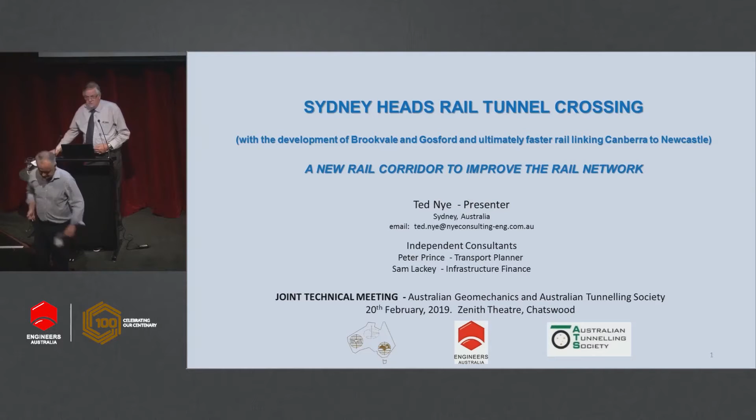Thanks for that introduction. I've got about 30 slides, so I don't want to do PowerPoint to death, but I hope you'll find that they're interesting slides.

So, I thought of this idea in '96 and took it to state-wide roads, and apparently at the time Lend-Lease and AMP were looking at a single track tunnel from Bondi Junction down to Bondi Beach. I didn't get involved in any discussions with Lend-Lease or AMP at the time, just with state-wide roads. Anyway, that got a lot of public protest about having a station at Bondi, so that project sort of just went by the wayside.

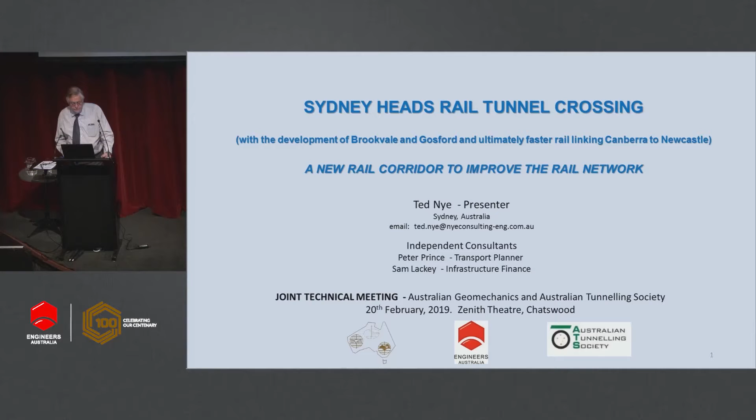Having known that, I then looked at this particular project with the idea of lessons learned, minimising the impact on the public, both in its construction and its operation. Peter Prince and Sam have been very strong supporters of what I'm trying to do.

Our objective in this - and this project is not on the government's radar yet, so I could talk a little bit about politics and meeting people in transport, but maybe I'll leave that for another day. There are some politicians who are very, very supportive, and others that don't really give any sort of reaction. I don't know why, I'm not a politician.

So our first thing is to get this in front of the state and federal government and get it part of their planning policy. Once that's happened, if it happens, there'll be some momentum to do a feasibility study and then a business case. For this tunnel under the Heads project, the business case is a really important part of the whole project, and part of that is developing Brookvale into a satellite CBD. I'll talk about that a bit later.

I've published two articles already. In November 2017, I went to a tunnel boring machine conference in China, in Wuhan, which was very interesting - about 70 speakers over about 2 days, with lots of case studies of Chinese tunnelling, and a few of us from overseas giving talks on our projects. You can download that from ResearchGate. The other one, published in October 2018, was in the Australian Tunnelling Journal. You may or may not have seen that, but you can go to the ATS website and download it, or go to the Tunnelling Journal website.

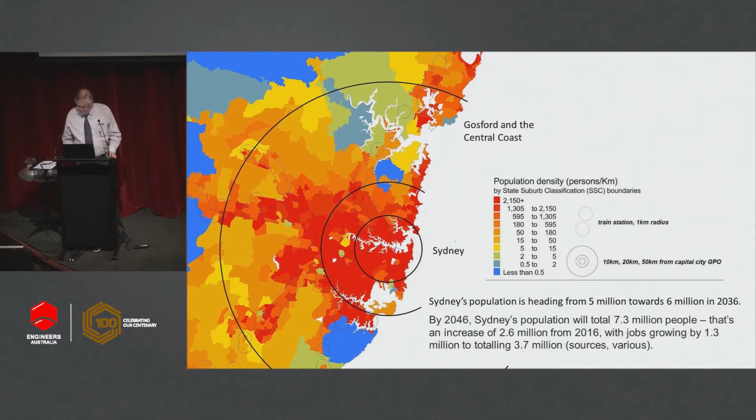The important other part of this project which we envisage is, if you're planning a transport network, you've got to connect transport hubs together. So the idea would be to connect Chatswood with Brookvale with a light rail connection. Now this is all obviously in the future.

Now if we're looking at Brookvale being a footprint potentially 3 times bigger than North Sydney, you're looking at Brookvale being a big city. So we're not talking about a few townhouses. So this transport is for envisaging that kind of growth.

I happen to live in French's Forest, so I'm very aware of what's happening in that area with the widening of Warringah Road up to 10 lanes, just in that little zone under Northern Beaches Hospital, with 6 lanes of traffic coming in on either side.

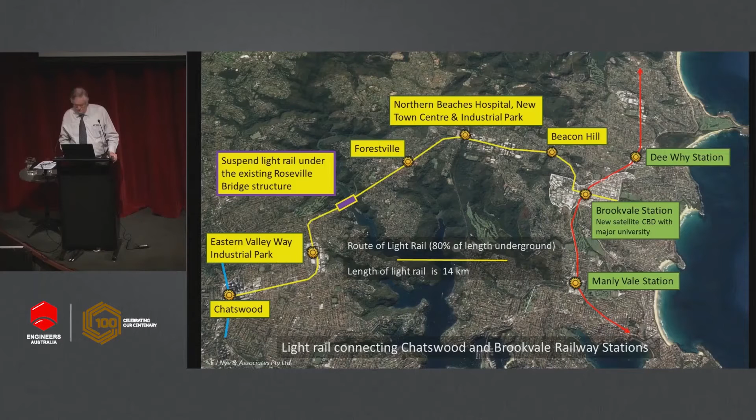The other interesting thing which I really didn't know about, and anecdotally I know Western Sydney's hotter than the coastline, but I did go to this WSROC launch, this Turn Down the Heat, just before Christmas.

So I suggest you go to their website and download the information. This is an extract. So there are 7 councils out in Western Sydney that are concerned about development and how urban development will increase the temperatures already out west.

So there's a lot of work been done in terms of what sort of materials these buildings should be built from, and so on.

Anyway, at the conference, or the launch, we all hopped on a bus and drove around this estate, and the houses had 150 square metres of land per house. The debate there was, and I was just listening, these mayors of the council and planners were saying, oh, we can't put any trees around these houses - that's the first thing, for shade.

And strategically, they're thinking even of building shelters for people to go to when it's hot. So I didn't say that, I just heard it.

So there you are. Things are happening out there which, unless you just put your feet on the ground and have a walk around and listen, you just don't know exist.

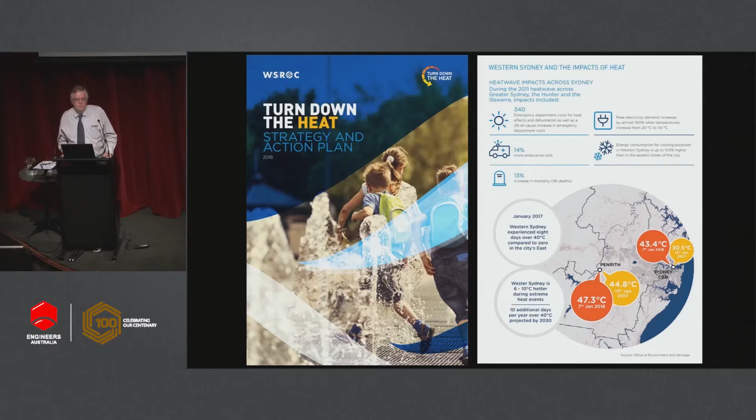Okay, back to this project. I've highlighted there just the area we're concentrating on, the small box on the left, your left. And the area we're talking about today is the orange area, just from Sydney to Gosford.

But in the long term, this project could be part of the first stage of a faster rail link between Newcastle and Canberra.

But obviously that's very, very long term. That could be, in my thinking, 30 to 40 years away before that happens.

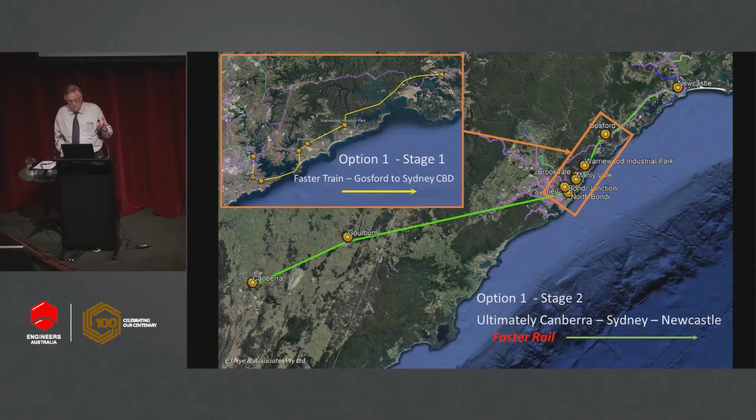So what we've got here is Bondi Junction, Bondi, North Bondi, Manly Vale, Brookvale, Warriewood Industrial Park. Maybe there'd be a station at Dee Why and then a station at Gosford. So you could put lots of stations, and the paper I originally wrote in 2017 talked about probably 3 or 4 more stations, but if you want to cut the travel time down, you've got to reduce the number of stations. So that's the idea here. If you're trying to service people in the Central Coast so they can really cut their travel time down, there's no point having 10 or 15 or whatever stations coming into the city.

The other advantage of having Brookvale as a satellite CBD is that people on the Central Coast can work in Brookvale. That can be their CBD, or Gosford can be a more developed regional CBD. I would envisage with a really efficient rail line that people on the North Shore might want to work in Gosford. So it creates a whole lot of more opportunities. Obviously people on either side of the harbour can get across more efficiently than they currently do. Obviously everyone down at North Bondi or Manly, apart from the ferry, has to travel up to the harbour bridge before they can go anywhere else on the south or north shore.

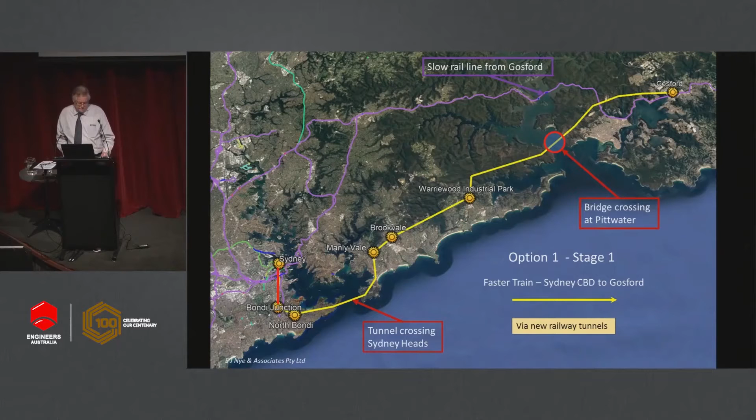So I guess I illustrate this point. There are a lot of crossings of the harbour. We've got a multitude of crossings at the harbour bridge with the harbour tunnel, the road tunnel, the metro, the new metro stage 2, and perhaps the Western Harbour crossing. It still leaves this great big gap of 7.5 kilometres, which means our transport system will always be inefficient.

You know what happens when there's gridlock on the harbour bridge? The whole city sort of stops. There's no real safety, there's no necessarily redundancy in the system. And that's certainly, looking at the Western Harbour crossing and where it's coming out at Warringah Expressway, is definitely my concern.

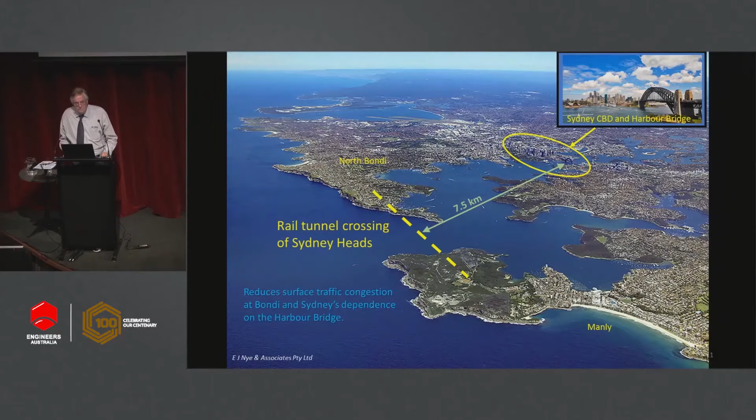So if we're going to tunnel under the Sydney Heads, I was very fortunate in 1996 that I was a consultant then to Statewide Roads, and Coffey's at the time were doing the site investigation work for the North Side Storage Tunnel, and they had a boat out at Manly, and just as a freebie they ran across the heads and did this survey across the heads. So that's the only information I know that exists. I thank them for that.

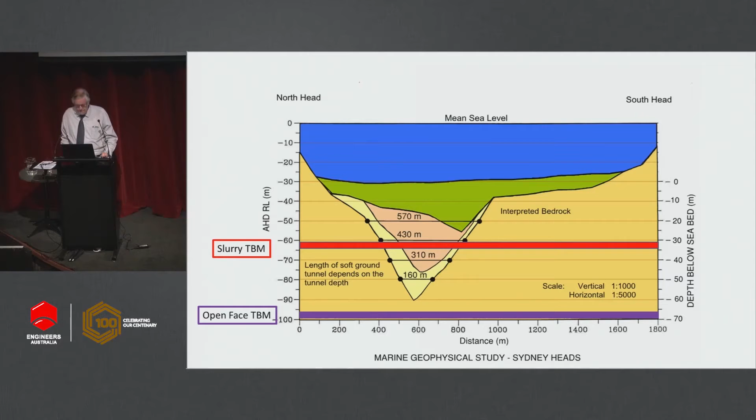And the other interesting thing on the geology of this area is you might think it's remote or difficult, perhaps, but there's been a lot of tunnelling done in this area. We've got the ocean outfalls at Bondi, we've got North Head, and we've got the North Side Storage Tunnel. The North Side Storage Tunnel was an open TBM, no segmental lining, and went under paleo channels at 90 metres depth, similar to what we're talking about going under Sydney Heads.

If we were going under Sydney Heads today, we would be using, perhaps depending on the depth, a segmental lining tunnelling method for a start. Now, obviously in the softer material, we'd be using a slurry or EPB machine. And the advantage of going deeper, because we're not going to have stations in this scheme near the shoreline, is that we can go deep and do quite rapid tunnelling on both sides of the harbour, probably more cautious under the harbour itself. So it makes the project very efficient if you don't have to stop and change over to specialised TBMs.

We will have to do that anyway around Rose Bay, but maybe also up Narrabeen Lakes. But the idea is to have the alignment back from the shoreline, and the stations back from the shoreline as well. And that's part of this thing about people on the North Shore being very sensitive about overdevelopment or the impact of transport on the normal suburban block that we have in Sydney, or particularly on the North Shore. So the idea would be to build this railway and have it operating, and people living in Freshwater, etc., just wouldn't even know it existed. Okay, so that's the sort of thing we're looking at.

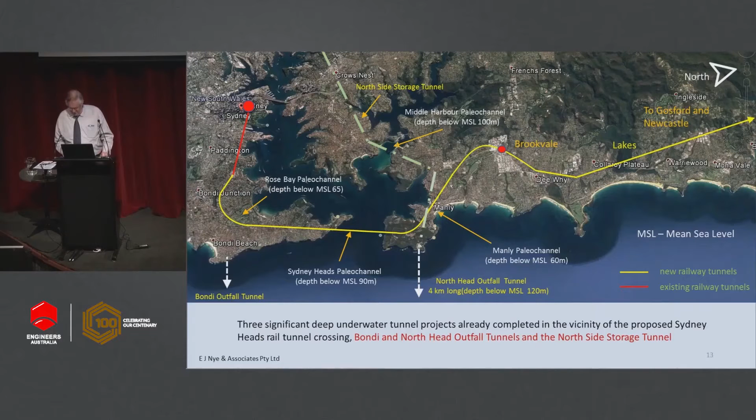In relation to experience that we're going to be getting in the next, well, you actually saw that the TBM was delivered to Sydney to cross the harbour earlier this week. So it's a 7-metre diameter slurry TBM. So that's got about 90 metres of soft material to cut through.

And obviously 15 metres head of water, where in our particular project, if it goes ahead, we're looking at 25 metres head of water, plus whatever head of water there is, depending on the depth of the tunnel. We also have Cross River Rail in Brisbane, projects in Melbourne crossing the Yarra River, and the Perth Tunnel in soft saturated sand.

So there's a lot of experience coming together all around Australia, and the timing is probably pretty right. I'd imagine that this sort of project, if it was going to get up, might start design in maybe the next 2 years. After Sydney Metro Stage 2 tunnels are completed, we'll all be looking for something else challenging to do in Sydney. So maybe this project might start in 2025, you never know.

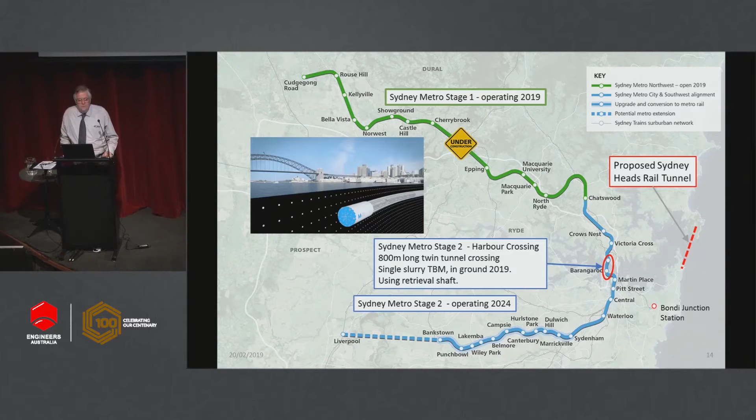I mentioned we start from Bondi Junction. The existing station at Bondi fortuitously has a crossover on both sides of the station. The second crossover went in in 2005. That means you can still operate trains into the station while maybe causing some disruption inside these stub tunnels, which is where you'd start off your new tunnel for access.

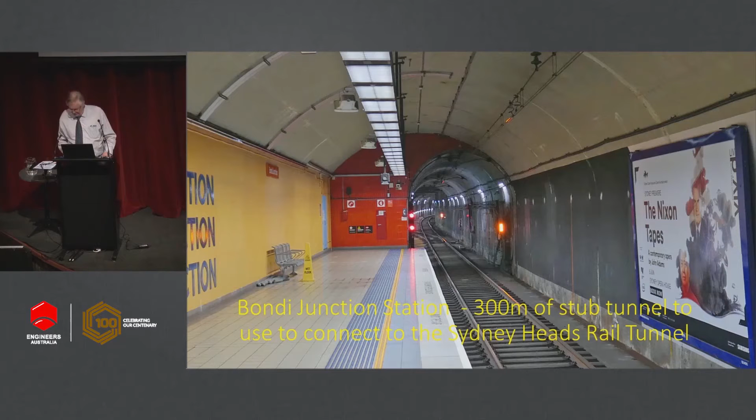That's not to say it's going to happen in the next couple of years, but there needs to be planning done. So with the Northern Beaches Road Tunnel, if that goes ahead, and knowing Pittwater Road, it is not going to help Pittwater Road at all. So what will happen if Northern Beaches goes ahead? I think people will see their traffic congestion really rise quite rapidly, and we'll be looking for alternatives. So hopefully that's where we'll get some legs on this project.

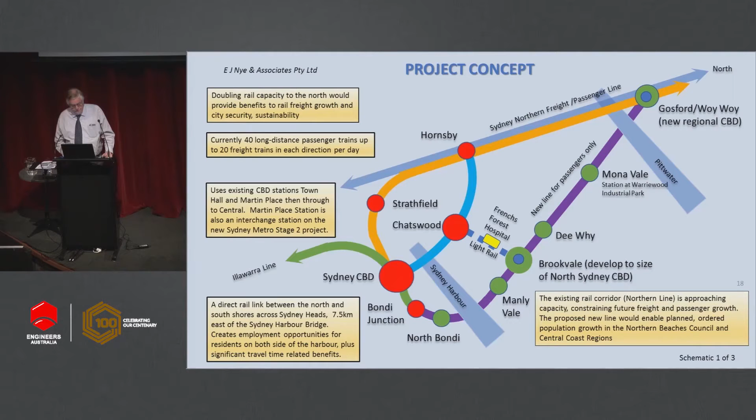And the other issue, getting back to traffic, this is just an idea that you put Pittwater Road perhaps into a cut and cover tunnel, and then you could move across that whole area of Brookvale seamlessly. If you know North Sydney or Chatswood, they're both a bit inhibited by the through traffic on the Pacific Highway. So the idea would be to eliminate that sort of traffic hassle so that people feel as though there's no barrier dividing the city itself.

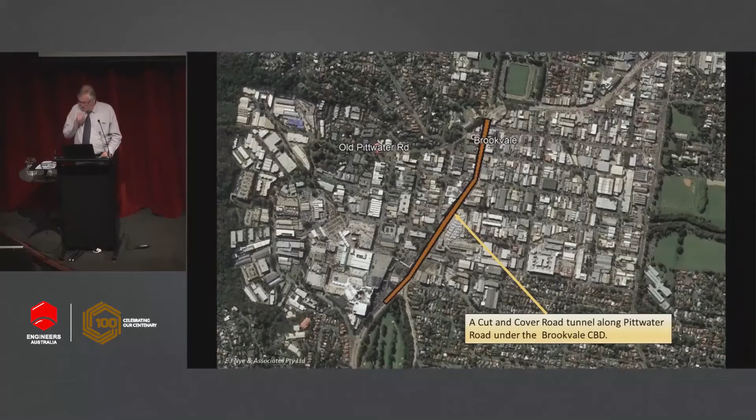So what I didn't mention, which I want to emphasise, is that this could be a mixed-use facility. It's not just—it could be something better than Chatswood, something better than North Sydney. So you'd have your high-rise, your commercial, etc. Then you could have a university—there's no new universities on the North Shore. You could have a technology park. Brookvale is a major employer of light industry, so what I'd be looking at there is to accommodate them, and perhaps other areas of the northern beaches, with a high-density light industrial park.

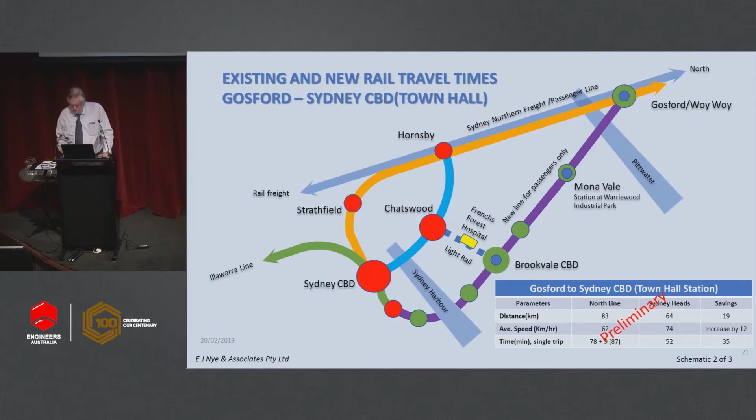So this could be a staged project. You don't have to go straight to high speed rail. It could be that you just extend the existing Illawarra line, just another 5 or 6 railway stations, using the same technology, and run it out to Gosford. Or you could upgrade the whole line to current metro standard with driverless trains. Or, way in the future, you could try to justify connecting Newcastle and Canberra using a very fast train service.

So this slide's a little bit about population growth. Currently, the population predictions for Sydney have been an underestimate, so I expect that in the next 10 years, that probably will be the same.

The idea is to provide these more dense but well-serviced areas of development, rather than this sort of densification spread across the whole of the suburb of the Northern Beaches.

We've been to Waverley Council and had discussion with them, and obviously you know what the traffic's like in Bondi. Bondi Junction, everyone parks on the streets. So the biggest problem for that council is parking.

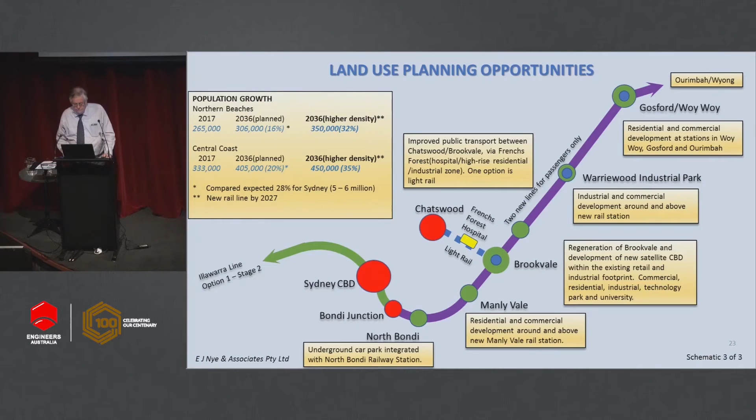I won't go through all the things on there, but you get the idea. So some of the advantages we see are new coastal cities and housing affordability. When I'm talking about coastal cities, I'm talking about the living environment, but also the earlier point regarding Western Sydney being very hot, and in my opinion, not necessarily a very pleasant place to put 1 million people.

We've got a lot of potential north and south of Sydney for further development on the coastline. So new world-class commercial centres—Brookvale, Gosford—perhaps even with a Northern Beaches University. Much faster rail, and definitely less dependence on the Sydney Harbour Bridge.

If you run the Illawarra line right through south up to Gosford, you're probably servicing about 2 million people. It doubles the capacity on freight rail growth to 2050. It's traffic congestion busting everywhere. The Martin Place Station interchange is enhanced because you're getting more passengers coming into Martin Place who can then transfer to Sydney Metro 2.

Because at the moment it just stops at Bondi Junction, it's not pulling in people from the North Shore. And around the stations, there'd be significant opportunities for private investment.

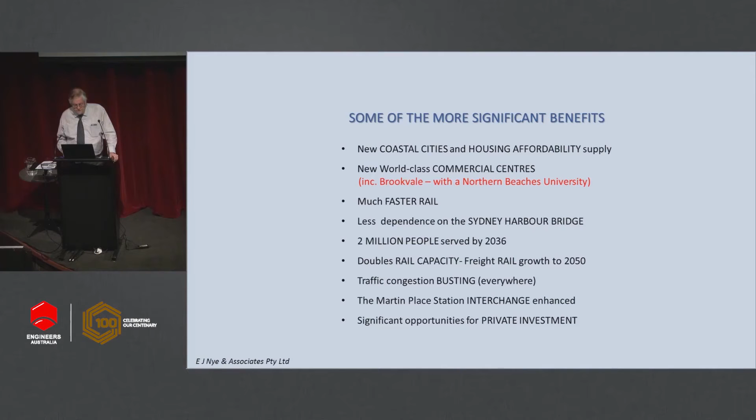Okay, so that's option one, which is just from the CBD, Bondi Junction, Gosford, and then ultimately maybe that could be expanded out to Canberra and Newcastle. But there is another option where we would rearrange the tunnels under the CBD.

We would run through Martin Place Station to the west, and the Town Hall Eastern Suburbs line would swing around and go under St James Station. I've got diagrams for this. And you would then connect Parramatta directly to Bondi Junction, and then from Bondi Junction to Brookvale, etc.

So Sydney would be crossed. You'd imagine the CBD of Sydney would have a north-south rail link from Chatswood down to the airport. It would go north-south, and then there'd be an east-west link from Bondi Junction through to Parramatta, and then from Parramatta out to Sydney, Western Sydney Airport.

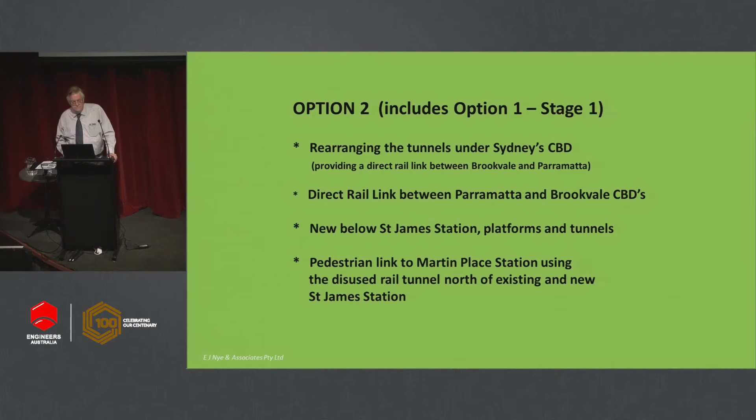So this is Bradfield's original sketch, and the link between St James Station and Town Hall was never built, apart from the area I haven't shaded, going north. So those tunnels exist, which I've been down and inspected, and tunnels south under Hyde Park.

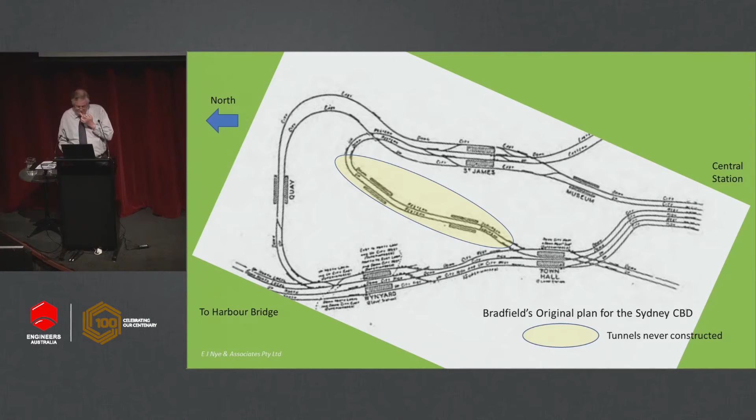So this is now 2019, and when these were constructed in the 1920s, obviously the high-rise buildings weren't there that they are today. So if we're going to link St James Station to Town Hall, because the Eastern Suburbs line - those platforms were built, but then that got morphed into the Eastern Suburbs line - we'd take that over.

We would tunnel under the Metro stage 2, and then we'd put the station under the St James Station box. So we wouldn't actually use the old railway tunnels, we'd tunnel underneath them. The old railway tunnels would become pedestrian links between, for example, St James Station and Martin Place Station, which then gets a new pedestrian link to the new Martin Place Station as part of Sydney Metro 2.

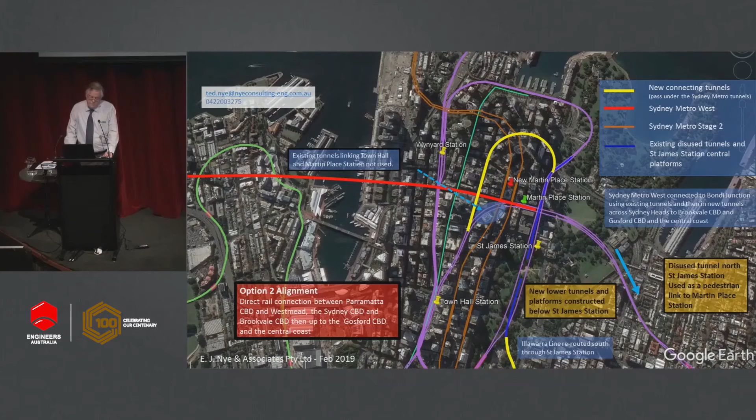That's just the line going out to Parramatta. And then if we swung the yellow line round under St James, it would go down to Malabar, down south. So that's the configuration - the top part of the station there is what exists at the moment.

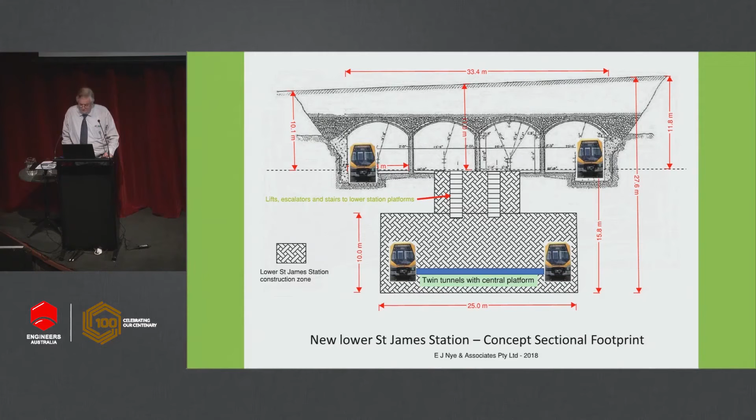So the two central platforms have never actually been used since the station was built - obviously just a pedestrian concourse. And if we were to put a cavern underneath, we would have escalators down to a new station below.

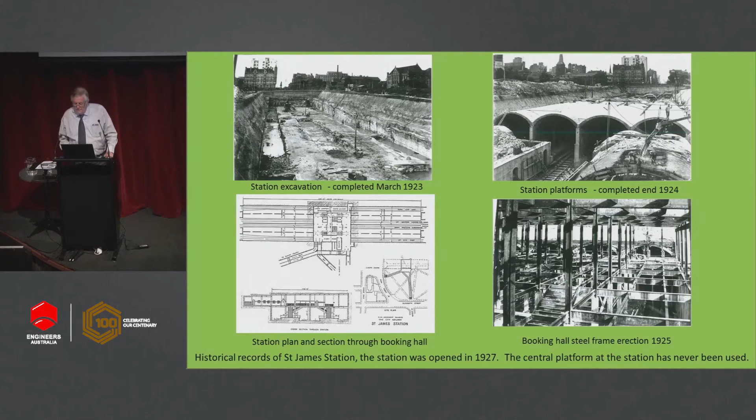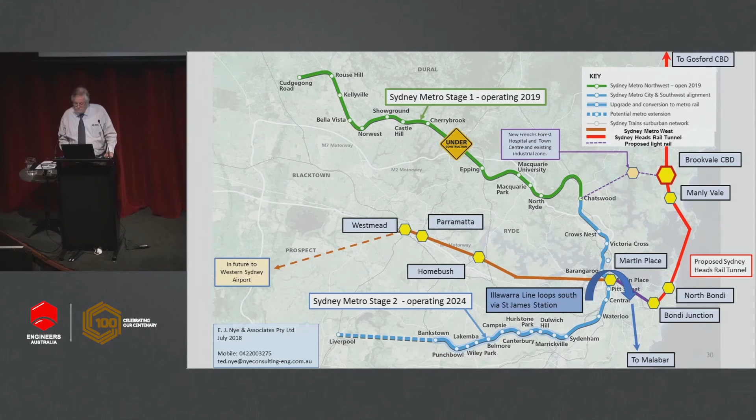All right. Any questions?

Ted, interesting talk, thank you very much. Just wondered, have you crunched any numbers on the cost of building this and the return it's going to make in terms of the population you're predicting?

Not yet, we've made a rough figure. The tunnels would be about 8 billion, because assuming it's very easy tunnelling, and the stations would be paid for by private industry.

Okay, I mean the argument is, there's lots of ways to do costs. So I was going to show a slide about, you know, it's costing us 9 billion dollars every year in traffic congestion costs, X billion dollars in medical expenses due to car accidents. I mean, there's so many other costs which are never taken into account in a lot of these models.

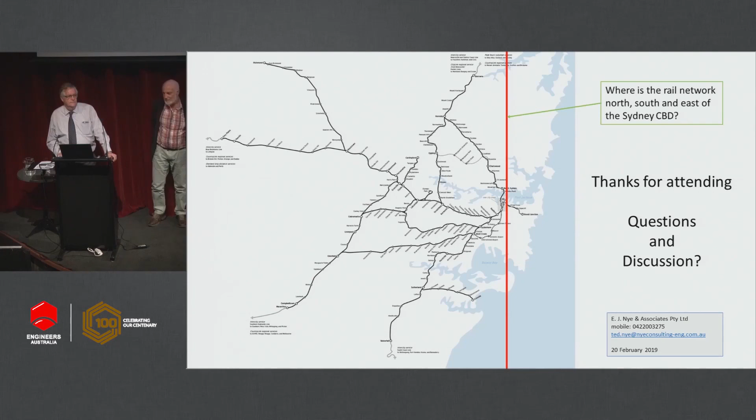It's been a pleasure listening to Ted, and thank you all for coming out - a very good turnout this evening. Ted led us through the concept he's had for a long time, culminating in the papers he's presented in the last couple of years. The talk touched on the politics and policies, and quite a few questions related to those too. He touched on the technical issues and the geology, the social issues, and the development of new cities, academic facilities, commerce, trade and industry. We touched on such a wide range of issues this evening, and I would like you all to join me again to thank Ted very much for the effort he's put in. Yes, thank you.